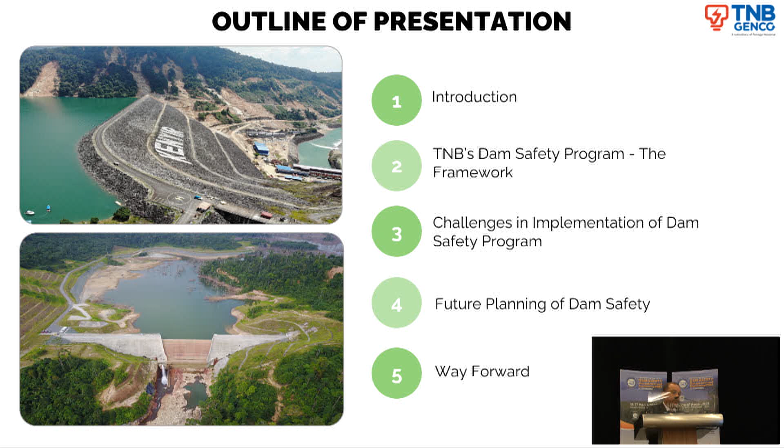So the outline of my presentation today: I will touch a bit on overview and introduction, the framework of our dam safety program, the challenges in implementation of the dam safety programs, what will be our future planning on dam safety, and the way forward.

Okay, basically these are some of the major dams that we are operating and maintaining at the moment. The major function of TNB's dams is to produce hydroelectric power, besides other benefits we contribute in terms of flood mitigation, water irrigation, and water consumption.

The dams are located in a few states - Perak, Pahang, Kelantan, and Terengganu - and were built at different periods or times, with the oldest probably Chenderoh in 1930, and the latest being Ulu Jelai in Pahang and Hulu Terengganu in Terengganu.

So the challenge we have here is that when we built the dams, the design at that time was based on certain assumptions in terms of risk factors and what variables were involved. But now there are so many changes in the factors that impact the dams. I would consider them internal and external factors - things that we are in control of and things that we are not in control of.

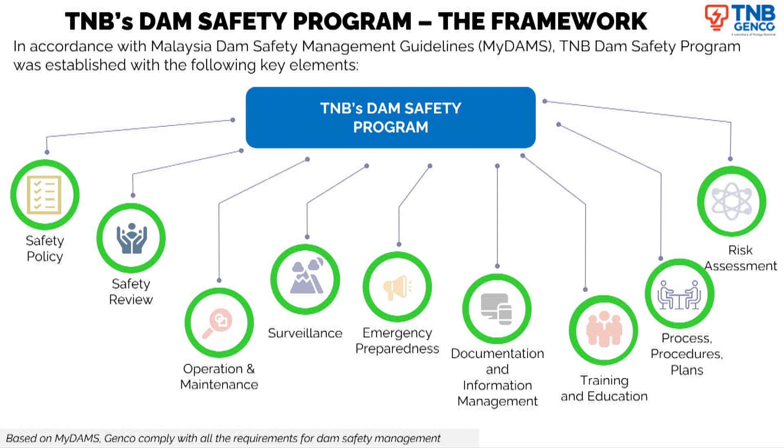So the first thing that we do is establish the safety policies on the 3rd of January 2022. So the policy is very important to give the undertaking from the top of management that we take dam safety management very seriously. So the commitment is from the managing director himself, and with the policy we outline what standards we are going to use, and the standards are going to be established and used across all our dams in our system.

Okay, next. And the dam safety review, as I mentioned just now, is carried out by registered professional engineers, by specialists, both from inside and also foreign, outside the country. This dam safety review is carried out for both structural and non-structural areas.

We look at the whole dam's safety aspects, and from the report, we use it to enhance or close any gaps found by this report. So this is very useful, as I mentioned just now, with regard to the new factors, the new variables that surface now.

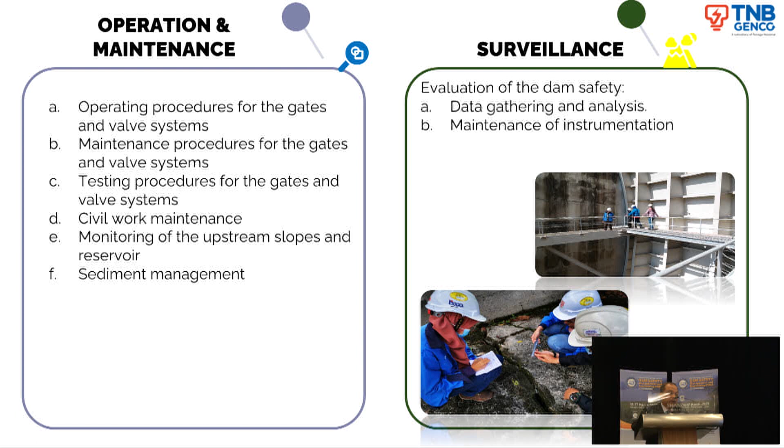Okay, next. The emergency preparedness, as I mentioned, is something that we take very seriously. We carry out drills every year, especially on the high-risk dams, and we engage the authorities, the major stakeholders like the district office, which chairs the local emergency preparedness, the bomba, the firefighters, the police, hospitals, and etc.

And we keep on engaging the people through many programs, through many briefings and talks, even at the school level, to let them understand what needs to be done, and what are the risks involved when they are living or staying very near to the dams.

Okay, next. The documentation and information management is very important, because all this data or information about the dams has to be properly documented, properly stored, and when you need it, it has to be available. All this data has to be verified and put in one place where it can be accessible to everybody. From there, all this data is used to carry out the risk analysis, and so on. So we make sure that now we have a centralized, very structured way of managing our data and information.

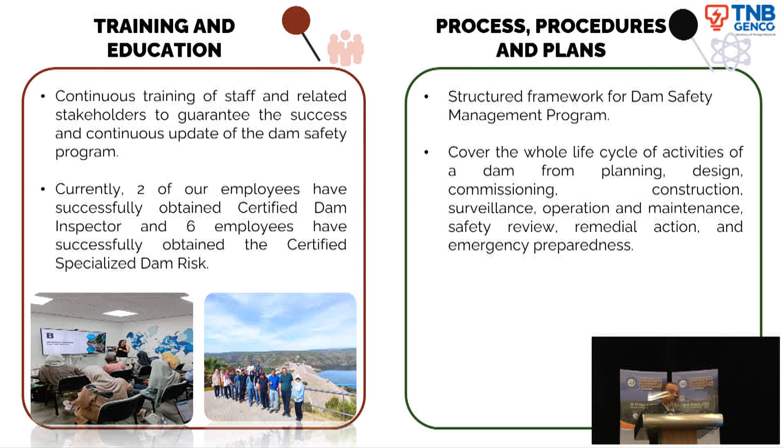All right, next, the risk assessment, as I mentioned just now, is also very important for us to carry out, to ensure the dam's status is at the level that is acceptable or meets the guidelines that we refer to.

So one of the latest programs we are doing right now is risk-informed decision-making. The objective of RIDM is to identify the dam's risk. We carry out the analysis, do the ranking on the risk, do the qualitative and quantitative analysis, what will be the impact if things happen, what will be the impact to the dams, and also, if we need to upgrade or improve the dams, what will be the cost-benefit analysis we need to carry out, so that whatever improvement we do is optimized in a manner that ensures the dams are at a very safe level to be operated.

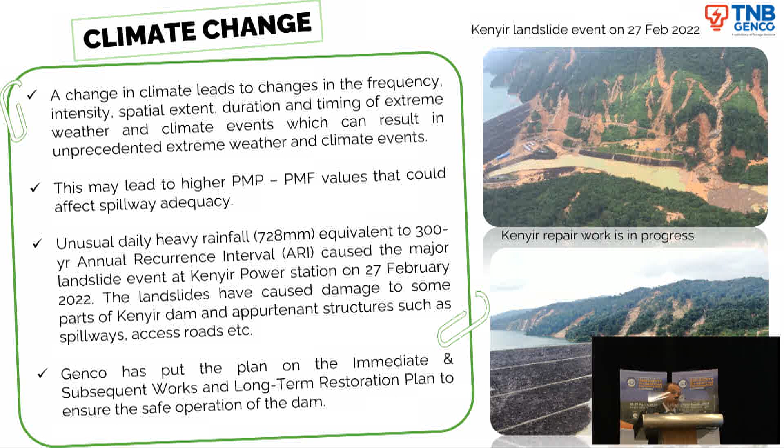Okay, next. I will go very fast. This training and education, I think I touched on just now. Next. Okay, on the future plan, please, next.

Okay, these are things that we are looking into. I think we want to enhance the dam's operation and maintenance through a more digital way, with new technology that we are embarking on, such as automation and instrumentation. We need this new technology to manage the dams so that we can gather more data, carry out better analysis, and enable more informed decision making.

On the dam safety chair, we are already part of the dam safety chair between GENCO and Uniten, where we can easily share information, knowledge, and so on.

Okay, next. On the way forward, next. These are some of the ways forward that we are looking at. We talk about integration of the whole system end-to-end, from the design to the end of operation, and also involving as many people as possible to help us. The instrumentation and monitoring has to be efficient, and we need to carry out risk assessment for all dams.

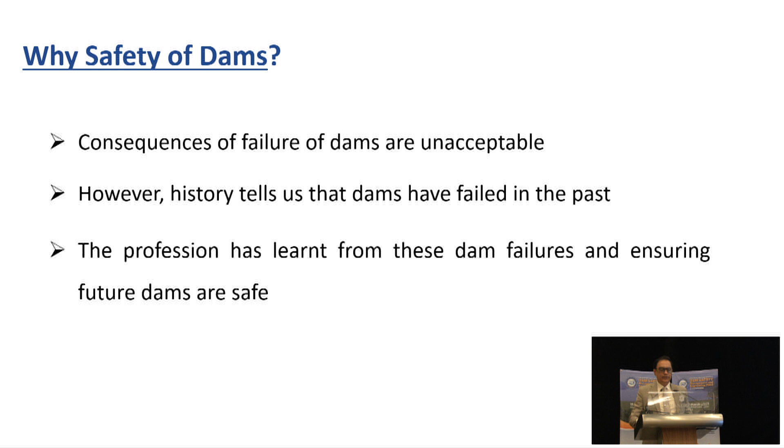Why is dam safety important? The consequences of failure of dams are unacceptable. This goes without saying. However, history tells us that dams have failed in the past, and the profession has learned from these dam failures, and we endeavor to ensure that our future dams are safe.

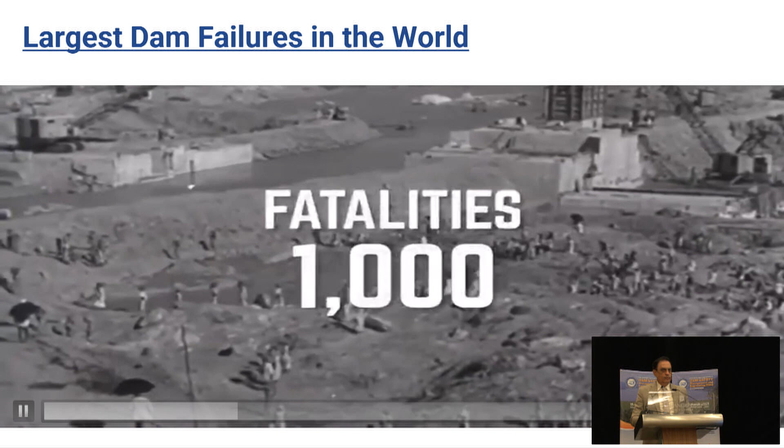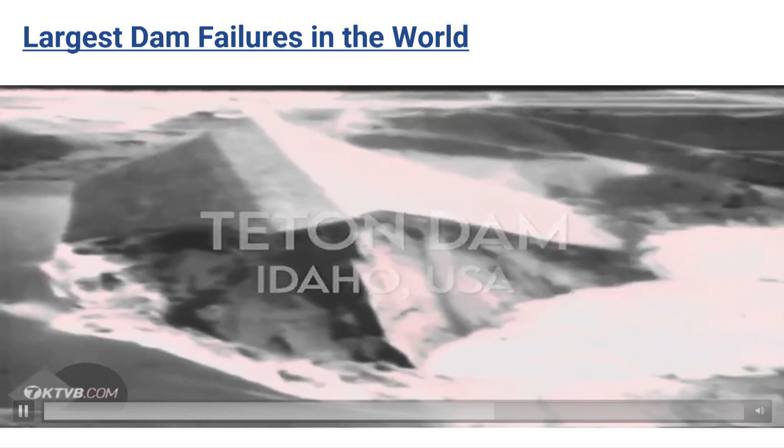Let's see videos of some of the dams which were not covered yesterday. Could you open the audio as well, please?

Highlighting the salience of a case study, the Teton Dam failure in 1976, an earth-filled dam standing at a height of 305 feet. Dams are very vulnerable at their first filling. In the first filling in 1976, catastrophic failure occurred due to development of sinkholes and a piping mechanism, one of the most important causes of dam failures. The embankment breached within hours after the first sign of seepage, and usually response time for mitigation is not available. The resulting release of water inundated an area of over 300 square miles, traveling a distance of 150 miles downstream. The dam failed due to design and construction flaws.

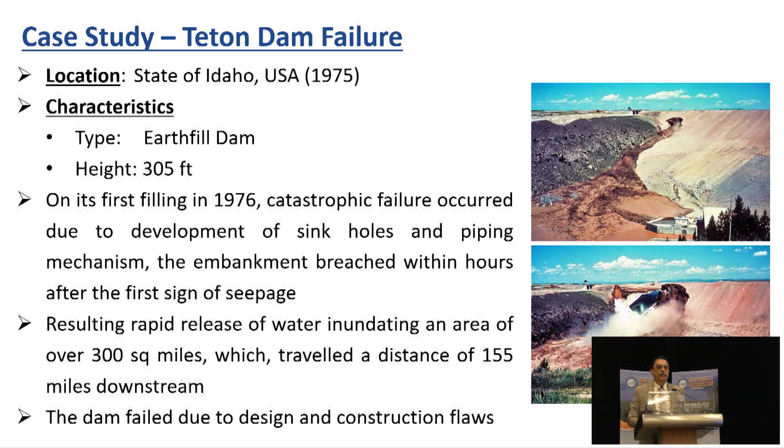I'll give a very brief snapshot of what WAPDA is.

WAPDA is the Water and Power Development Authority of Pakistan, and our charter is integrated development of water and hydropower projects for the socio-economic uplift of Pakistan. We have developed storage dams of more than 20 million acre-feet capacity, among the largest in the world. We are also the largest supplier of hydropower, contributing over 95% of the country's hydropower. We have the institutional capacity to plan, develop, operate, and monitor water and hydropower projects, and are financially viable for supporting future expansion plans. WAPDA's operations are aligned with Sustainable Development Goals, UN SDGs 6, 7, 8, 9, and 13.

At this point in time, we are operating 22 operational projects, generating close to 9,500 megawatts, with a storage capacity of 20 million acre-feet.

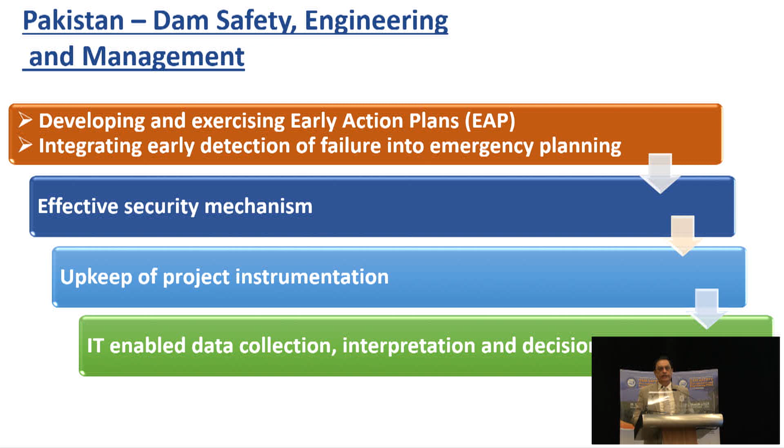How do we articulate dam safety engineering and management? It is done at 3 tiers. At tier 1 is the project office, which carries out routine inspections, emergency preparedness planning, and rehabilitation options. At tier 2, we have a dam safety organization at the federal level.

This provides surveillance through inspection and instrumentation and deficiency investigation. At tier 3, we have periodic inspection, with third-party independent experts coming from around the world who carry out comprehensive periodic review of dams through national and international protocols by a renowned expert. This is done almost every 5 years.

So how do we organize these tiers? At tier 1, which is the project office, regular inspections are carried out, empowered by 4 departments at every project site: an instrumentation division, a seepage and geology division, a movement control survey division, and a sedimentation survey division. This is the basic tier at the project level.

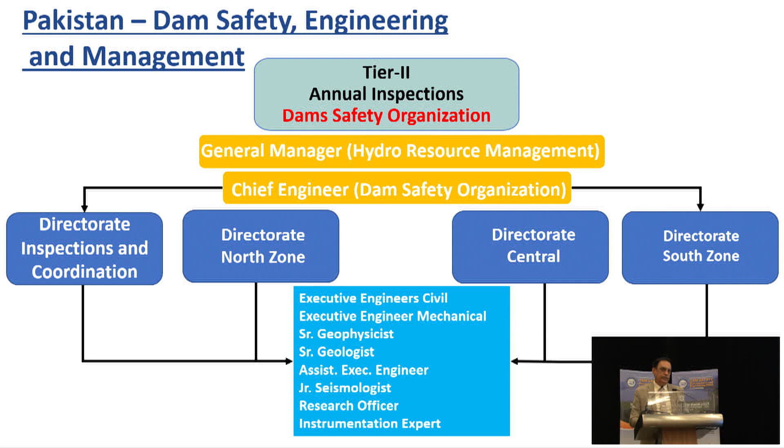At tier 2, we have annual inspections carried out by dam safety organizations. They fall under a central directorate of inspection and coordination, and then we have 3 different regional directorates which carry out dam safety: a northern zone, central zone, and a southern zone directorate, empowered both in terms of manpower, equipment, and skills.

Now, what are the critical dam safety factors? Pakistan, as indeed the entire world, is at the mercy of climate change, and we are prone to both flood and seismic activity. This has become significantly important during recent years. Obviously, as elsewhere in the world, sedimentation continues to be a challenge.

How do we address this? Technological awareness through instrumentation is absolutely necessary. So we have put in place hydromet stations across the rivers and streams. At this point in time, more than 200 hydromet stations have been deployed, and their deployment is essentially in the north, which is from where we draw our rivers and our waters.

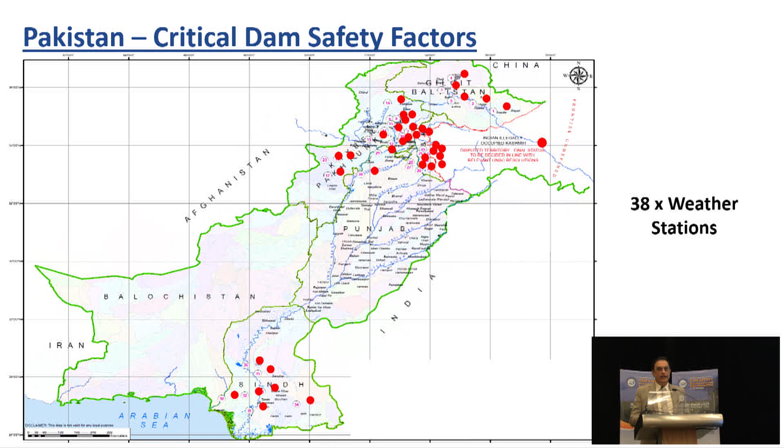Equally important are weather stations. There are 38 weather stations that monitor rain and other weather-related events.

Seismic activity is most significant. Pakistan lies in an active seismic zone, and all dams in Pakistan are designed based on site-specific seismic hazard studies following international practices. These studies are carried out and vetted by top experts in the world, and WAPDA maintains 29 micro-seismic stations at every dam site, along with a rigorous network of strong motion accelerometers to monitor the structural health of the dams.

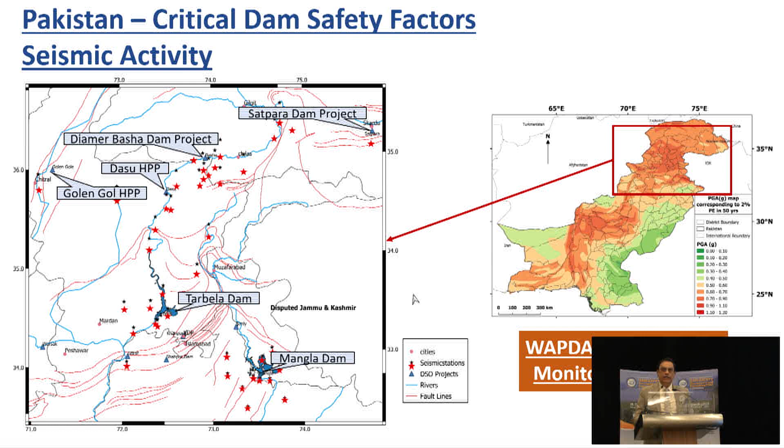Critical seismic factor: as you see on this slide, the safety evaluation of earthquake is given, and the peak ground acceleration is also indicated. A look at the figure will tell you how intense these could be in areas where our large dams are located. In Tarbela, it's 0.65 G, and Diamer Basha Dam, which is under construction, is designed to cater for 0.64 G. These are huge values.

So what are the dam safety phases we need to consider? Safe design to start with, and continue to review it. The challenge is how to cater for all these design parameters and risk factors for structures built 50 years ago. Construct to international standard and adopt changes in design due to site conditions observed during construction. This is significant. And continue to operate safe and sustainable, resorting to periodic maintenance.

Very quickly, two case studies in safe operations and maintenance. The largest earthfill and rockfill dam in the world, Tarbela, height 470 feet, earth and rockfill. Look at the live storage capacity when it was built, around 10 million acre-feet, good enough to submerge at least 30% of the country. Installed capacity is about 5,000 megawatts.

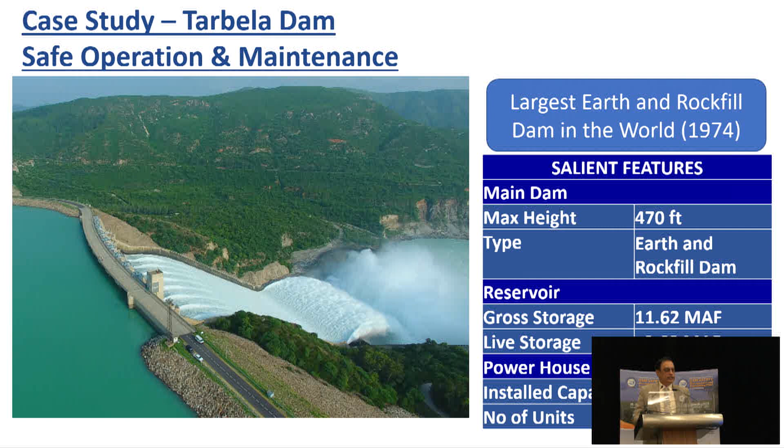Soon after this dam was built, 362 sinkholes developed in the upstream blanket due to open work gravel in river alluvium. These sinkholes were by no means small—the largest had a diameter of about 40 feet, and the deepest sinkhole had a diameter of 13 feet, occurring because of excessive erosion. WAPDA at that time adopted innovative measures, including sonar detection and filling through large barge dumping, with expert advice from renowned world professor Dr. Arthur Casagrande. From the formation of sinkholes in many clay cores, the profession learned about self-filtering criterion from this incident.

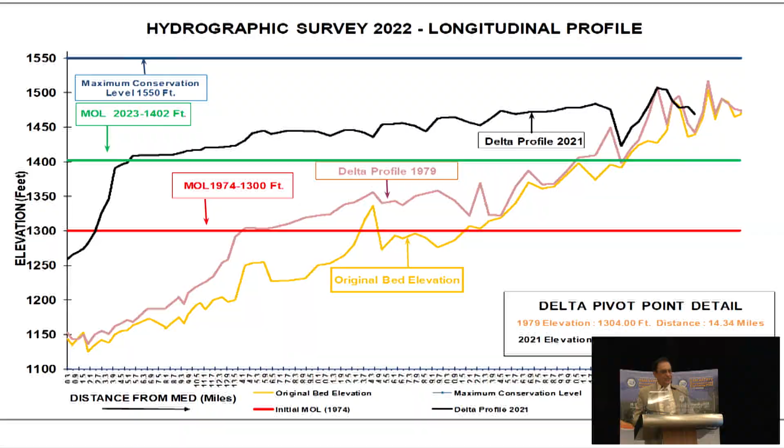High sedimentation is the issue, and the challenge is that it reduces irrigation supply, damages power installations, flushing causes damage to downstream infrastructure, and blockage of low-level tunnels due to liquefaction of sediment. What are the solutions? Sedimentation is the largest challenge dam operators face throughout the world. Short term: raise the minimum operating level from 1,300 to 1,402, and retard the advancement rate of sediment from 0.3 miles per year to 0.16 miles per year.

In the medium term, the intakes of tunnel 3 and 4 have been raised. And in the long term, another dam is being built upstream of Tarbela, which will enhance the life of the reservoir by 35 years.

This is a brief case study of the under-construction tallest dam in the world, standing at a maximum height of 272 meters, but lying in an intense seismic zone, also prone to GLOF, glacier lake outburst flood phenomena. The dam has a live storage capacity of 8 million acre-feet and a generation capacity of close to 4,500 megawatts. As we were undertaking the design, the seismic activity and unprecedented floods mandated a review.

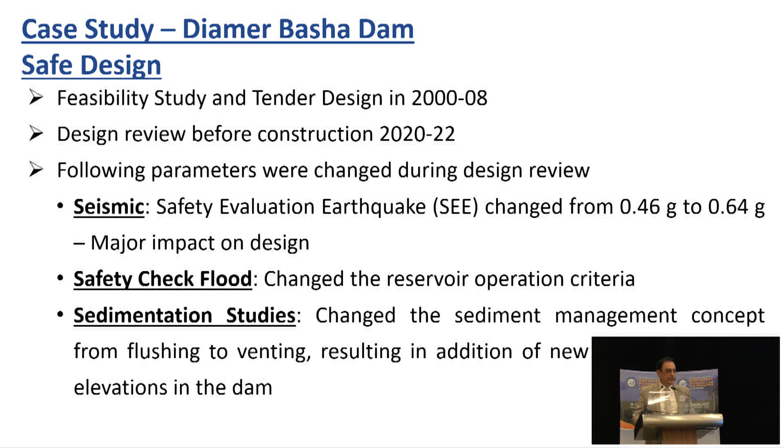This dictated feasibility in 2008, and because of seismic activity, we had to change the G from 0.46 to 0.64. For safety check flood, we changed the reservoir operation criteria, and the sedimentation study changed the sediment management concept.

Changes in powerhouse cavern, waterways, shifting of left power tunnels - all of these had to be undertaken.

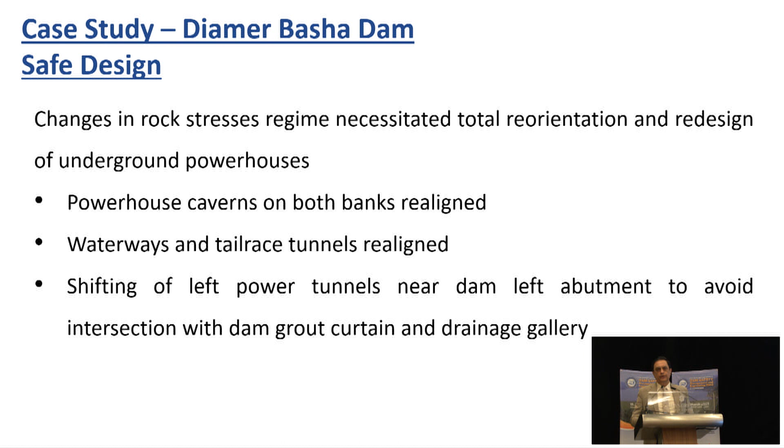So for state-of-the-art knowledge, various organizations provide guidelines, including ICOLD, and we also draw sources and inspiration from other sources of knowledge.

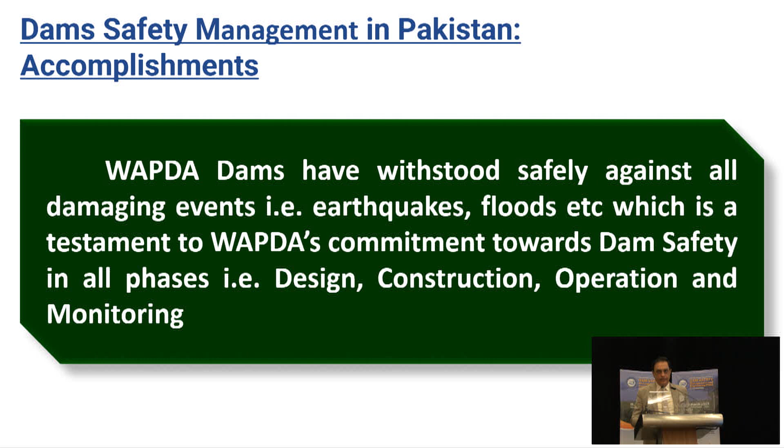WAPDA dams have withstood safely against all damaging events, earthquakes, floods, etc., which is a testament to WAPDA's commitment towards dam safety in all phases: design, construction, operation, and monitoring. And this is a slide that you will all love. Thank you very much.

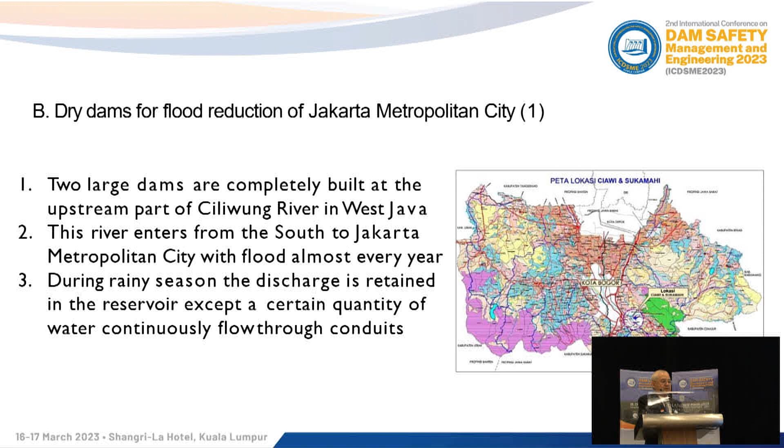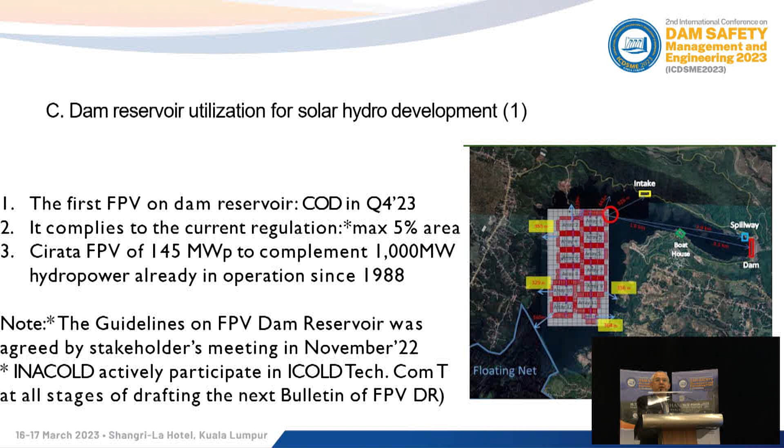For this one, I can go into further details. Cirata is actually a difficult example as a pilot project. Why? Because the height of the dam is 125 meters, and the water level going to the bottom can reach about 100 meters.

There was a long discussion on how to secure dam safety. We had to convince the developer for almost 2 years to take into account what should be done to secure the dam, the spillway, and the intake in case of any failure to the floating PV, either through the anchoring or mooring system. That is why the anchoring and mooring system, shown on the bottom right, is very carefully designed.

We learned from the failure of floating PV at Yamakura Dam in Japan. The critical issue there was the anchoring losing its power because of a typhoon. For that reason, in our case, we added special protection to the intake, the spillway, and the dam. We are now monitoring the construction of this anchoring and mooring system, which started in March and should be completed around September or October this year.

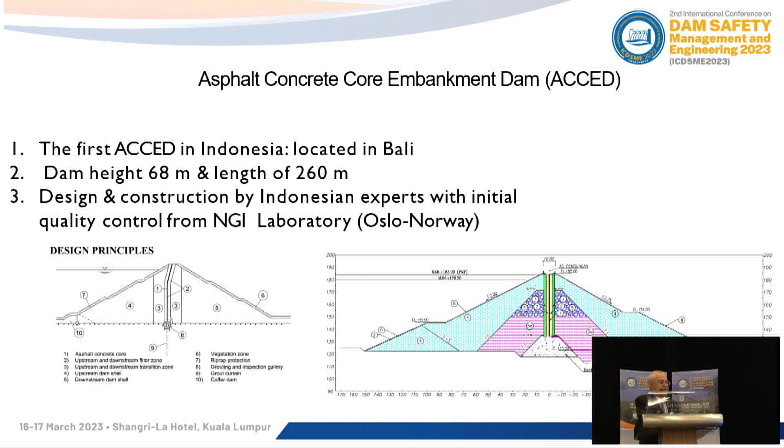So what we did was modify the paver and other equipment available in Indonesia, without waiting for special equipment from Europe. We also used natural sand instead of crushed sand, and conducted triaxial tests on site at a later stage after learning from experience, since sending materials to Norway takes time. The detailed design and construction by Indonesian experts for this asphalt core was successfully conducted, as shown on the right of this slide, completed a few months ago. We are now happy to see two more asphalt core dams in progress in Bali Island, and another in Timor Island.

So these are the closing remarks. Dam safety is paramount at all stages of hydropower and floating PV development. Innovation in design, construction, and operation of dams should be encouraged by the authorities to achieve more sustainable development. My appreciation goes to MYCOLD, and I invite you to see us at the World Water Forum, May 2024 in Bali. Thank you very much, and have a successful conference until the end of this week.

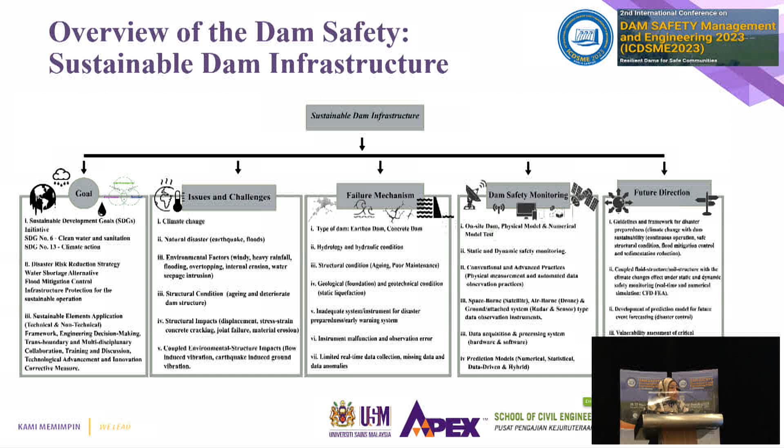This is the overview of dam safety, which supports sustainable dam infrastructure. As you can see here, it has several divisions: goals, issues and challenges, failure mechanism, dam safety monitoring, and future direction, which falls under SDGs - specifically United Nations SDG number 6, clean water and sanitation, and number 13, climate actions.

In my introduction, these are some of the questions I will cover: the potential threats to dam infrastructure sustainability, the potential mitigation measures to support dam sustainability, the dam safety concept, dam safety assessments to support dam sustainability, the triangulation between dam safety, dam sustainability and SDGs, and finally the integration of a holistic approach that may support dam sustainability.

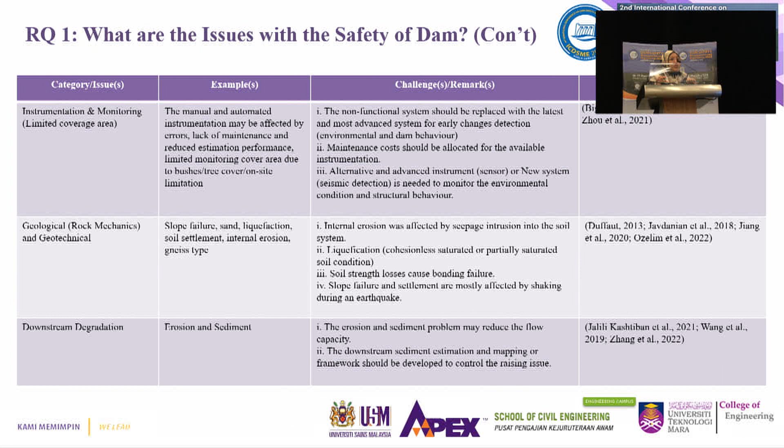As you can see here, most of it, the presence of climate change may alter the environmental conditions, for example with the presence of earthquakes, natural hazards, and the frequent appearance of natural hazards such as earthquake and flooding from intense rainfall events.

And then the presence of hydrostatic pressure, the seasonal variations, the seepage intrusion, and the dam behavior responses may appear in the forms of dam displacement, concrete stress and strains, concrete cracking, and internal erosion.

And the worst one is the downstream part, which receives impact from the high velocity flow, which is downstream erosion and sedimentation.

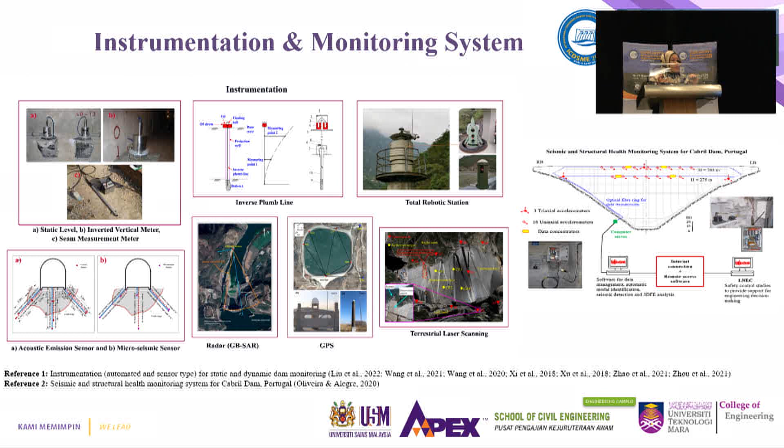And on the right you can see the seismic and structural health monitoring system for a dam in Portugal, which has a vibrating system to detect seismic activity, for example accelerometers, to detect how high the hertz reading is.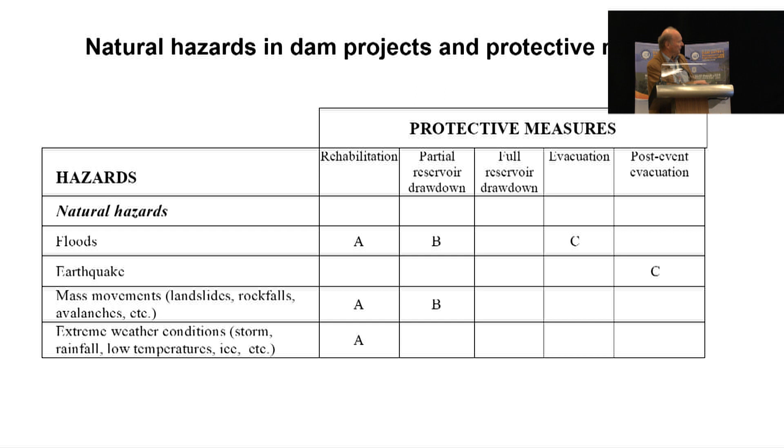Okay. Can you put the full screen? Yes.

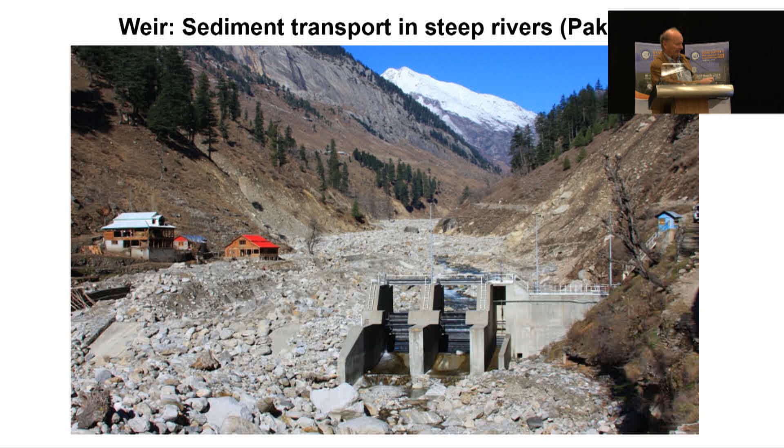Next, please. Yes. Okay. I would like to show a few examples of dam failures which are not so well known, but there were a few significant failures in Italy. This is the Zerbino Dam in Italy.

It is a masonry dam, and it was overtopped, and because it was overtopped, the sliding stability of dams which are actually of moderate height decreases quite significantly if overtopped. If you have overtopping of a 100-meter high dam by 2 meters, it doesn't change your sliding stability substantially. But if you have a 10 meters high dam overtopped by 2 meters, basically your dam may be washed away.

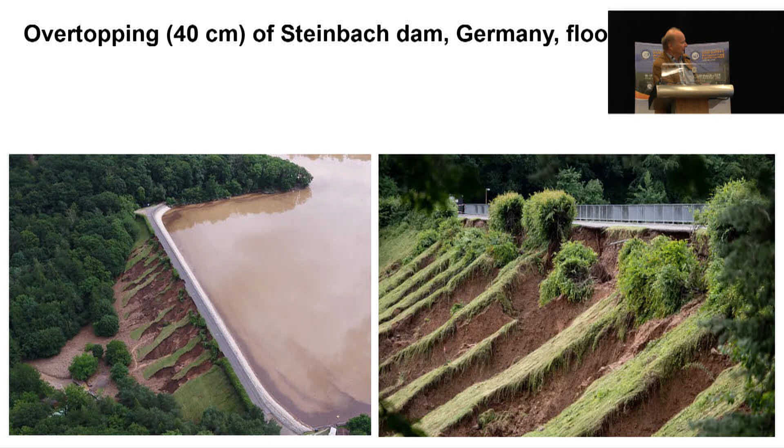Okay, does it come? Somehow this doesn't come.

This is already very old. If you would include in your safety evaluation the seismic loads which were omitted, you would have easily found that this dam was unsafe. And when finally they say static liquefaction—anybody dealing with earthquakes knows if static liquefaction has occurred, this dam has never been safe for earthquakes. This is a typical case. So people like to talk about static liquefaction. It is a kind of people not doing the job properly.

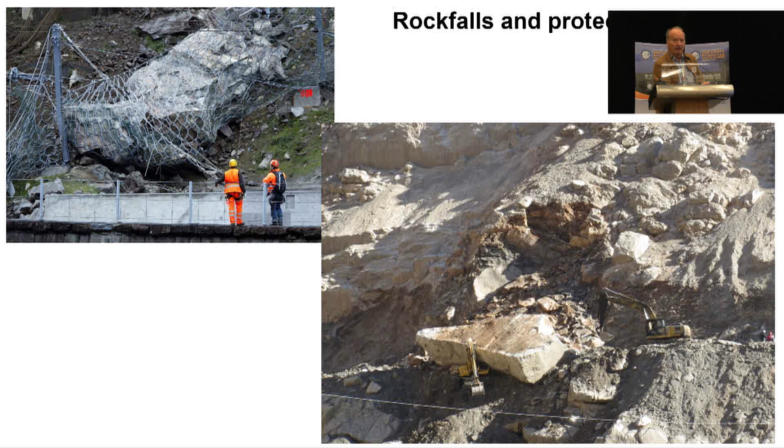We also have, in reservoir impounding, some stability issues, shown here in a reservoir in Iran.

This is the Vaiont Dam, a famous failure of this slope here. You see this whole slope failed. There was one arch dam, at that time the world's highest, 260 meters high. This slope failed with 260 million cubic meters, basically displaced the whole reservoir, and the flood wave overtopped this arch dam by more than 100 meters.

But the dam is in a narrow canyon. When I visited this place about 4 years ago, you see here from this huge overtopping we just have some local damage near the crest. The dam is still there, but it is not operated. Downstream, about 2,000 people were killed. It's the biggest disaster in Europe from dam construction.

This is from Switzerland. This was also the world's highest arch dam at some time, 250 meters. But you see, we also have a lot of rockfalls. Some rock penetrated or destroyed this retaining wall and fell on this abutment. You see here some rocks falling from higher elevation, creating quite some craters in the concrete.

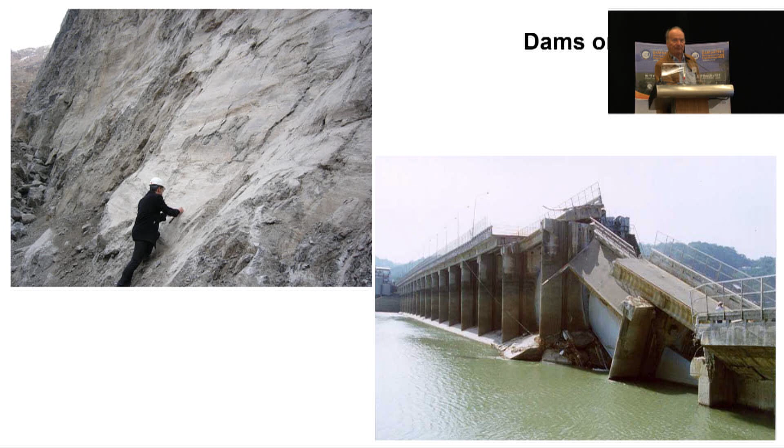Typical features of earthquakes in the epicentral region are the huge number of rockfalls. This is from the Wenchuan earthquake. Some people mentioned about 100,000 rockfalls, not just one. I think it was also mentioned for Kenyir Dam in Malaysia, where it's all rockfalls.

This is from Iran, 1990, just near the dam. Here is actually the intake of a spillway, so quite big boulders falling there.

This is a dam damaged in Japan during the 2011 earthquake. Actually it failed due to overtopping, and about 8 people were killed due to the failure of this dam. The water was released very fast, which caused a rapid drawdown failure of the reservoir flanks.

It's quite unusual - those doing a stability analysis look into the load case of rapid drawdown, but this is an accidental rapid drawdown. You see here this is not just at the dam, this is at the reservoir rim. So due to rapid drawdown, we have this failure.

Now this is from India. You see one of the problems encountered if people are using the old-fashioned design method, which I wanted to mention. Even when an earthquake occurs, some damage occurs, but according to the design method no damage should have occurred. We see here some damage. So the old-fashioned concept, which I'm sure you also like to use here in Malaysia, does not really guarantee that your dam will not suffer any damage.

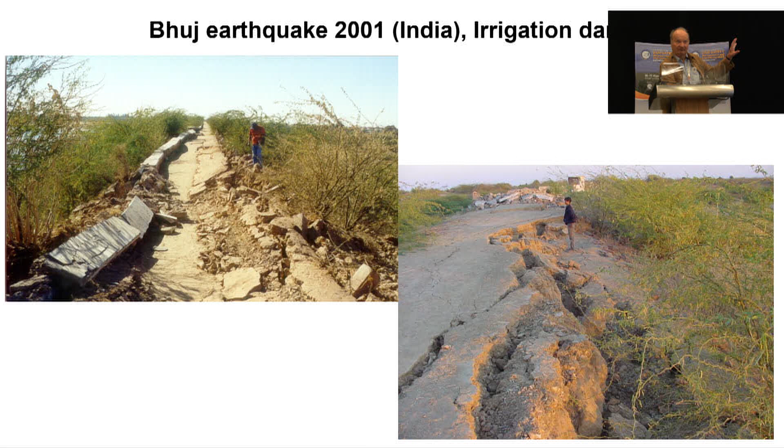This is just to show the effect of the quality of dam construction. Finally, the behavior of dams depends on the quality of your dam.

And you see here, this is in Albania, in Europe. There was only a magnitude 4.1 earthquake. In Malaysia, you can have that everywhere. So if you have a poor quality dam, you see a major slide here, almost a failure.

What I want to say is, if you have a poorly designed dam, even small events like the static liquefaction I showed before could cause failure of these dams. So in your dams, you must be very sure to have really good quality construction.

Next one. This is the opposite case in Japan, a good design. Here the peak acceleration was more than 10 times higher than in the previous one, about 1G. This dam is about a 74-meter high rockfill dam, and it only experienced a settlement of about 40 centimeters.

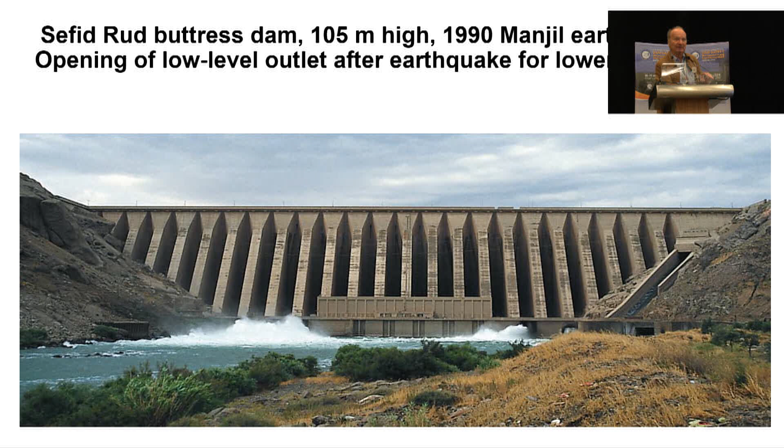Okay, we see here some damage in a concrete dam. There are some cases which are exposed. The next one, just to go.

And of course, we have a lot of damage also on the buildings near the dam. We have damage in switch yards, partly on excavation, partly on fill, and we know seismic structures on fill are very sensitive.

Next one. Now what are the options for mitigating effects of natural hazards? I've just shown a few. First, we can design against these hazards.

Number two, we can eliminate the effects of hazards. For example, for a powerhouse, if you have a rockfall hazard, you build an underground powerhouse, so you eliminate that hazard. So there are some options for how to do that.

We can reduce the hazards by stabilizing, for example, some slopes. We can install early warning systems. We prepare emergency action plans, and we provide water alarm systems for alarming the people, as has also been presented already.

Next one. So let me say a few words about man-made hazards, if I have just 5 minutes left. Man-made hazards, as was also mentioned, include design errors and poor construction. I mentioned already, quality of construction is a key issue.

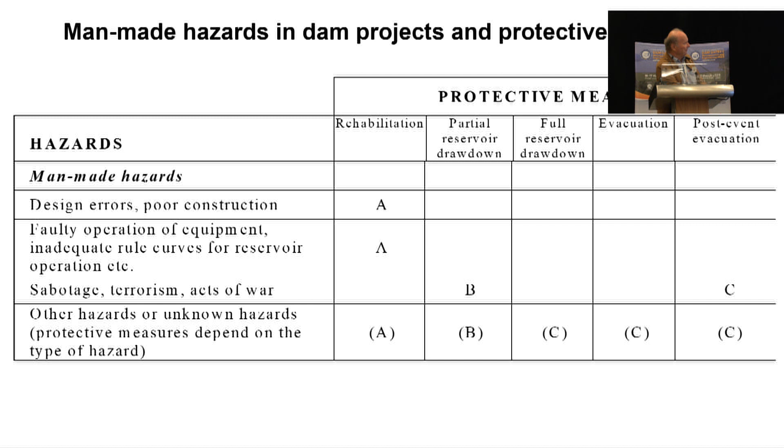It failed because they were pumping water into the upper reservoir, and the water gauge indicator was not working properly. There were new staff, so they were pumping water not knowing that the reservoir was full, and it overtopped.

So we can also say today, if you have upper reservoirs, even though there's no inflow, you still need a spillway, and the spillway capacity must be equal to the pumping capacity. So it is basically also a design error, and it was a faulty error in operating this plant.

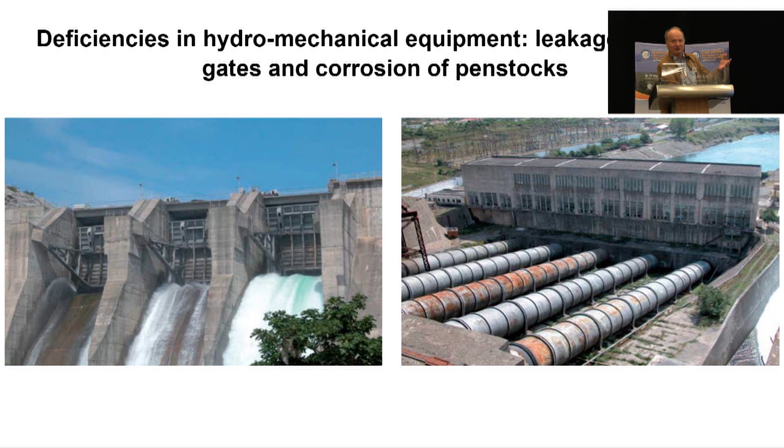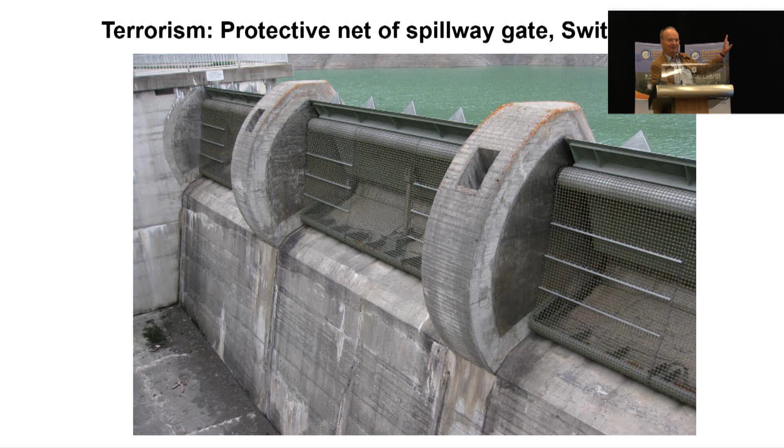Now, there was some problem. It has about 6,000 megawatts, one of the biggest power plants in Russia. Due to the operation of the turbines, there was fatigue failure of bolts, and then due to internal pressure it exploded. It destroyed 9 of its 10 units, basically the whole power plant, the powerhouse, due to fatigue failure of bolts in its turbines.

It took about 5-6 years to replace them, and during that time the water had to be released by the spillway. The spillways are also not designed for this long-term operation. In this area, they also had minimum temperatures of -50, maybe every 10 years. It was pretty cold, so a lot of ice created also in the spillway, affecting the spillway operation.

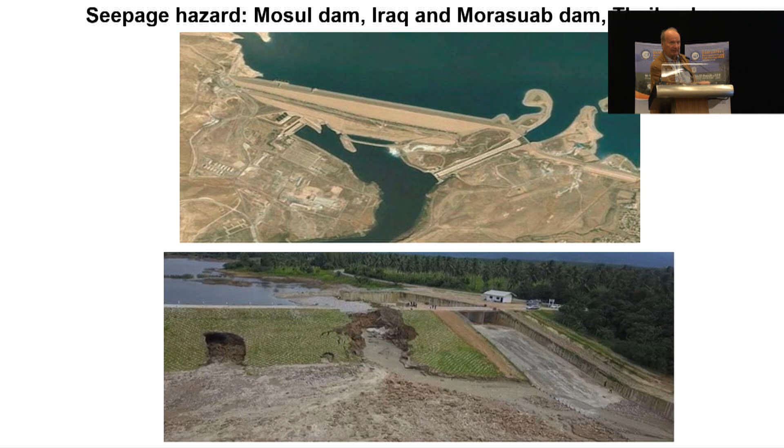To conclude: large dam projects may be subjected to a large number of hazards, not just natural hazards like flood and earthquakes. Most people doing safety analysis are basically focusing only on those, but I hope I have given you a broader view of the hazards which are applicable - natural hazards, man-made hazards, site-specific and project-specific hazards. And there are new hazards which have emerged, and those new hazards are man-made hazards.

Most hazards which I have shown are time-dependent, not only the climate change hazards. Dam engineers actually know how to deal with time-dependent hazards, and those who are concerned with dam safety also know how to deal with climate change hazards. It's not different from the others, and the answer is basically you have to do periodic safety reviews - not a prediction in 100 or 200 years, but a participatory approach by looking into the safety at intervals, let's say every 5 years, and at that time you will see if some action is required.

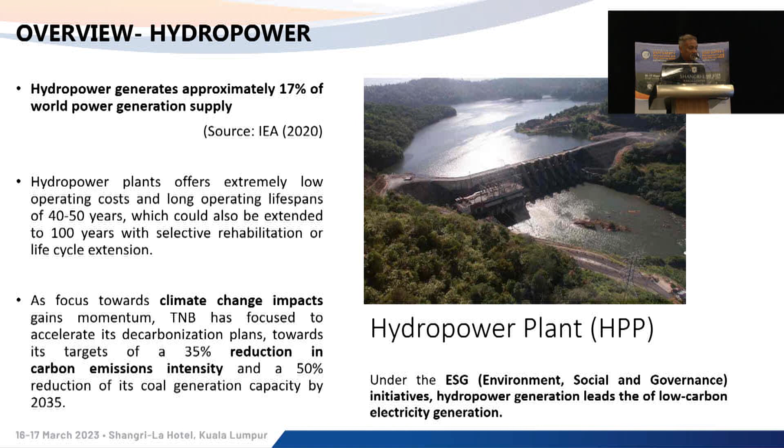So there are a few types of hydropower. So we did talk about storage. So this Piah, I'll be talking about run-of-river. And of course, pump storage, we have plans for that, but we really don't have one yet, but there are some studies ongoing.

So the main components of the hydropower scheme involves weir, intake, tunnel, headrace, powerhouse, and all sort of components. So this layout on the right is for Sungai Piah, for the lower underground scheme.

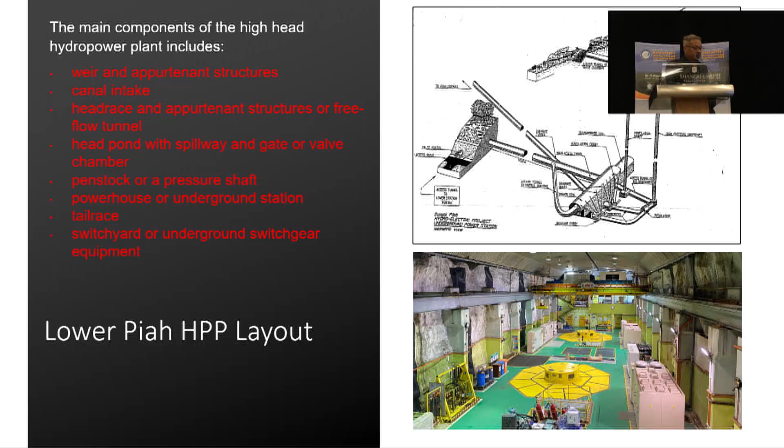Dr. Roslan presented also. The oldest scheme is actually Chenderoh, but apart from that, we also have Cameron, and Piah is about 31 years old. So it's also equally old.

Okay, so we'll be touching on the lower scheme.

So this section of the tunnel, which is about 12.5 kilometers long, consists of the tunnel network from the upper powerhouse right up to the lower powerhouse and the tailrace section. So during our routine inspection, we do inspect these tunnels to see their conditions and so on.

So I'll be touching two of the intakes under this scheme and their conditions.

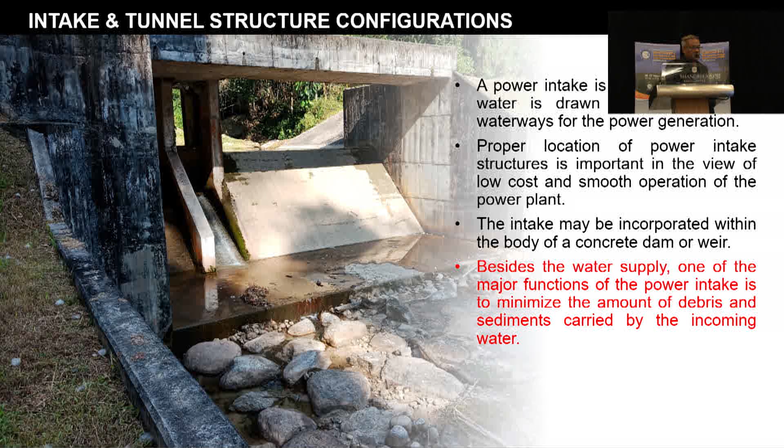So intake and tunnels, they are basically interconnected. The intake is actually to divert the water into the tunnel system and then to the powerhouse. So they have main function not only to draw water, but they also are designed to eliminate to a certain degree debris and sediments.

So by design, there are two types of design for the intake. One is what we call a lateral intake structure, which most of the larger intakes will look like this. They will involve inlet, trash screen, spillway, settling basin, and so forth.

This is an example of a lateral intake design, which is at Pergao. This is a Terang intake pump station. So these are all the lateral slots that goes into the power system.

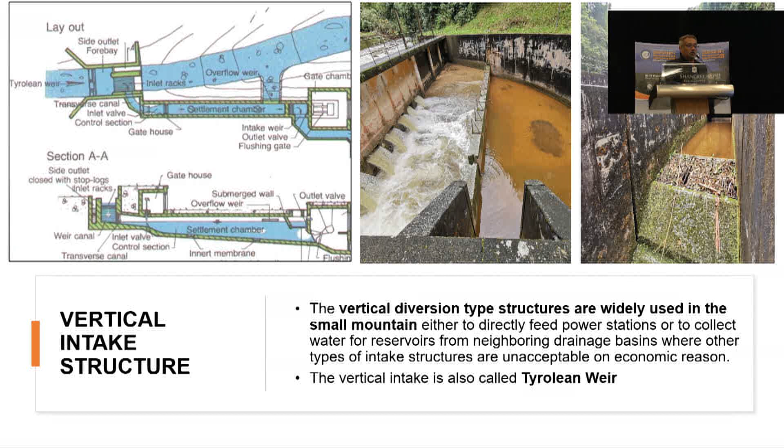While the vertical inlet structure also has a typical weir that diverts the water, here the water enters through the intake structure through a series of vertically installed trash screens, and then it goes into the tunnel system. So water drops more of a vertical motion.

This is an example in Austria. So this is a full inlet that's placed on the weir. So ours is slightly different than this design.

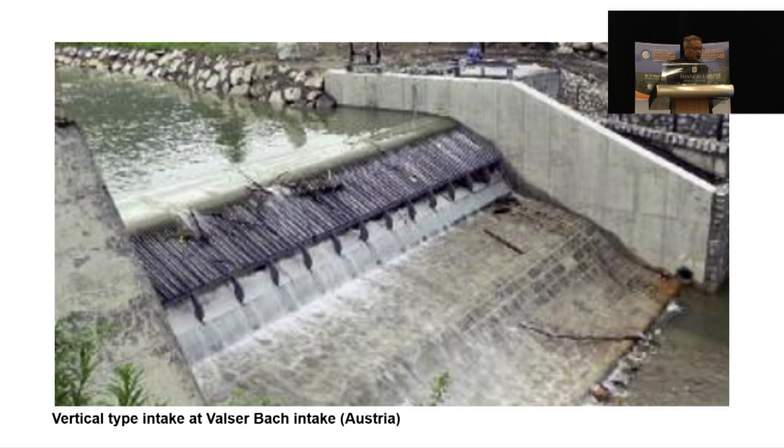Okay, so 2 case studies. So this is Sulieh. So when we inspected this structure, we were hoping to see a lot of structural damages, but we also found other things that are there inside the tunnel, which also requires attention.

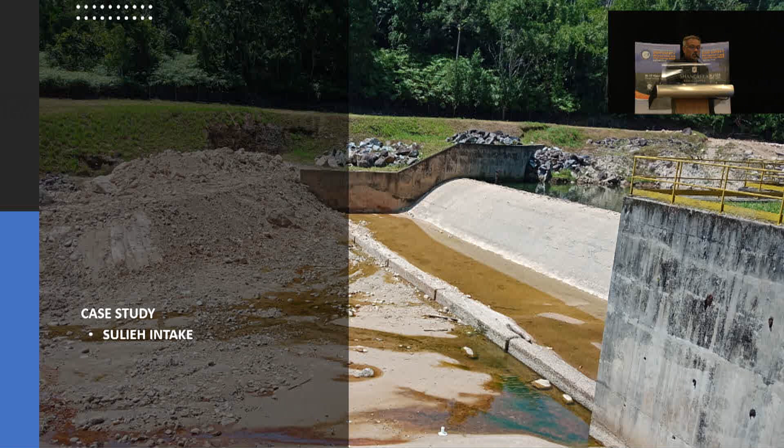Okay, so it has a lot of features. It has a weir, it has an intake chamber, it has a desander, and also flushing conduit. So basically, when this was designed, in 1980, the design included a desander, so there was a design assumption that sediment will enter this intake and it has to be mitigated, so the design is there.

Okay, this is the desander. It's a single section desander. So when we entered, we do notice a lot of debris at the intake and also at the trash screen.

The flushing tunnel is used regularly to flush, and that's why the desander is empty. Periodically, sediment are being removed from the desander.

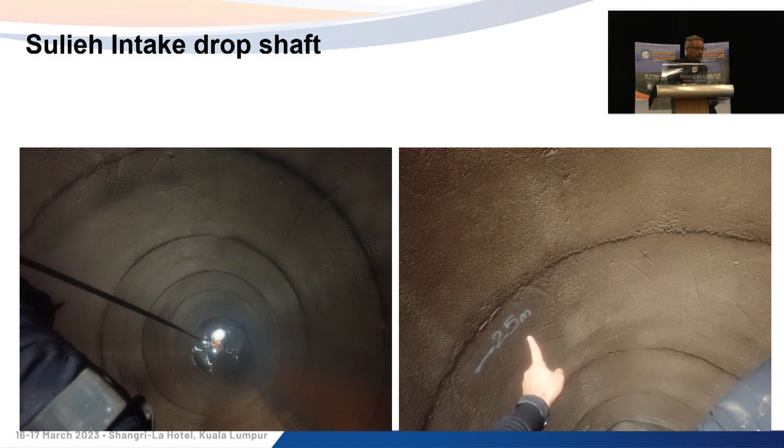We also inspect the shaft. Normally we do this by abseiling from top to bottom. This is about 30-plus meters.

When we drop down to inspect the bottom part, we notice that this section of the diversion adit between the intake and the main tunnel was quite full with sediment. That did not allow us to enter because the mud there is a little bit soft, and it's almost about 10 meters in length, almost blocking the entire opening.

This is the view of the sediment that we noticed from inside the tunnel. That makes us wonder about the capability of the desander, and also why so much sediment entered into the main tunnel from the intake.

Findings: the pond itself has quite a large amount of sediment at the intake area, mostly consisting of sand, silt, and clay.

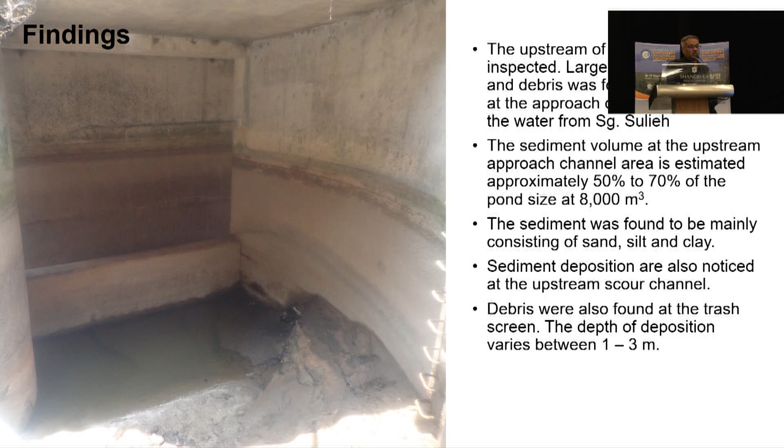Inside the tunnel, we notice the adit is almost 50% blocked. While the sediment volume is not so big, once it's completely blocked, we will have a backwater effect, so you don't get a fully efficient tunnel system going through the hydropower scheme.

This is the upstream. It's a very small stream, single stream. So we went down.

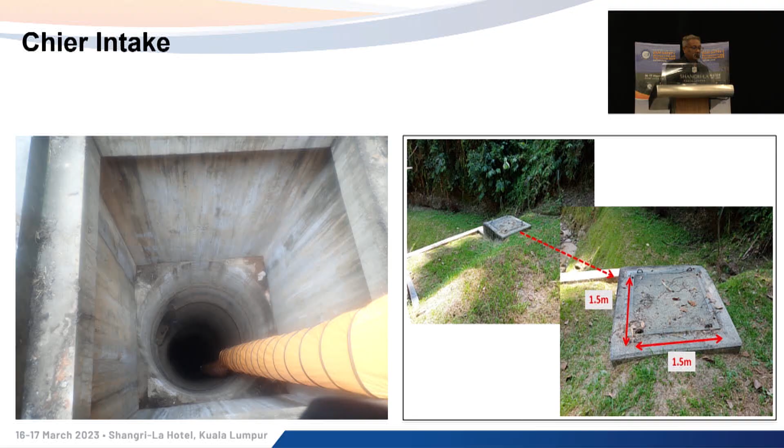Again, you notice there's a lot of sediment inside the tunnel section.

Here we try to go in to see how far we can go in. This engineer is seated there; you can go and ask him about his experience. Over a 30-meter length, the full section is covered, almost about 70-80% of the entire tunnel system, blocking the whole section of the inlet.

Inside the tunnel sections also, we notice a significant amount of sediment. Findings next.

By estimation, we noticed that for the design period, the sediment volume is roughly around 5,000 cubic meters a year, but today we are looking at 10 times more. When it's 10 times more, definitely everything will start to choke.

More frequent maintenance, more cleaning, and more inspection have to be carried out to identify how we are going to address this issue, because it also causes inefficiency to the hydro plant itself. This is an ever-going battle that we address.

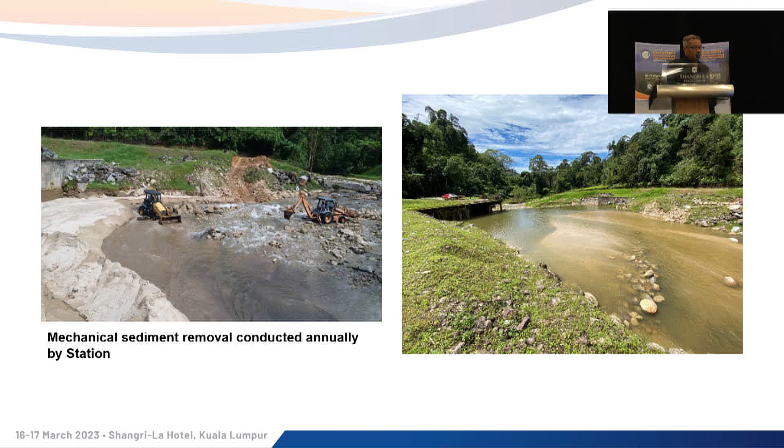We carry out some periodic clearing work at the intakes, including mechanical excavation. This is at one site, where people work manually because it's a very small area and you cannot bring an excavator in, so we have to do it manually.

Conclusion: the design caters for an older configuration. Nowadays, with more land clearing and so on, we need to relook at the configuration as well as the design requirements. We might need more desanders or more frequent maintenance, but these are some of the issues we are addressing for our hydro intake.

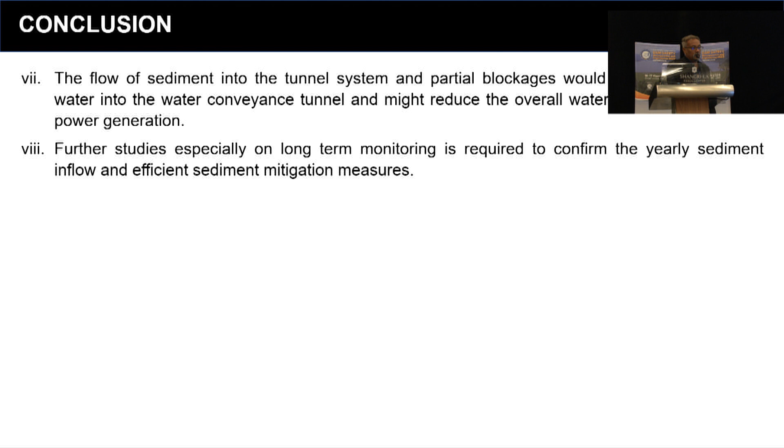Monitoring is still ongoing, and we also try to improve every time we see a situation arise. Thank you, this is the end of my presentation.

I hope that was 10 minutes. We're doing excellently, much better for time than before. We have time for one question, if anybody would like to ask.

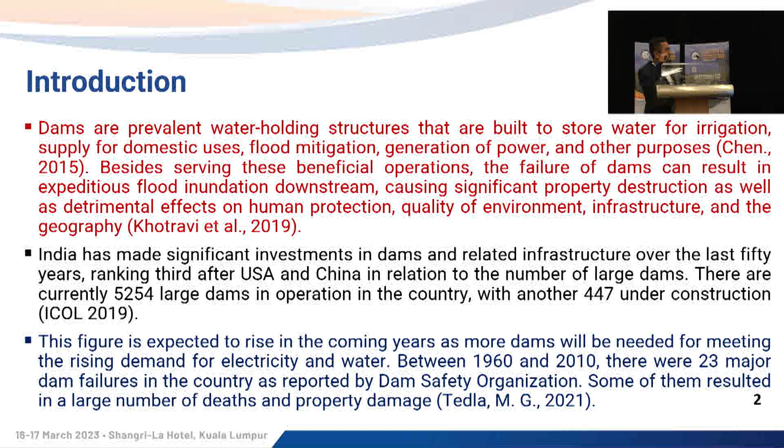For consequences, dam break simulation and subsequent flood simulation are critical for identifying the mitigation potential of dam failure threats. Over the past few years, HEC-RAS, Hydrologic Engineering Center River Analysis System, has become the most frequently used software for dam failure studies.

It is open source. My study is based only on open source datasets. In the scarcity of data, we can use open source datasets. Our data is based on geospatial techniques. Many researchers have simulated models based on HEC-RAS dam break analysis.

The objective of my study is to perform dam break analysis of Ukai Dam using a 2D HEC-RAS model, to prepare flood inundation maps in terms of water depth, velocity, water surface elevation, and arrival times, and to predict dam break flood magnitudes and generate the break hydrograph. These are the three objectives I'm going to present.

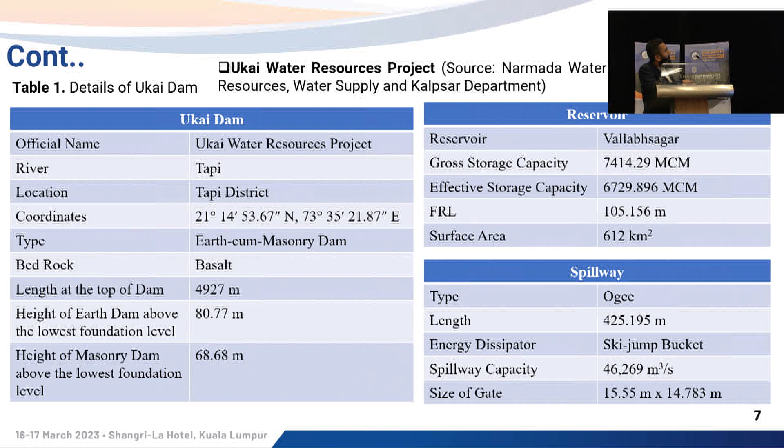These are the data I have used. SRTM data, as I mentioned, this dam break analysis uses open source data. We used 30 by 30 resolution DEM, sourced from the USGS website. The projection file was directly downloaded from spatial references. The land cover map was obtained through MODIS land cover. Inflow and discharge data of Ukai Dam came from the 2006 flood hydrograph, with hourly inflow and discharge values.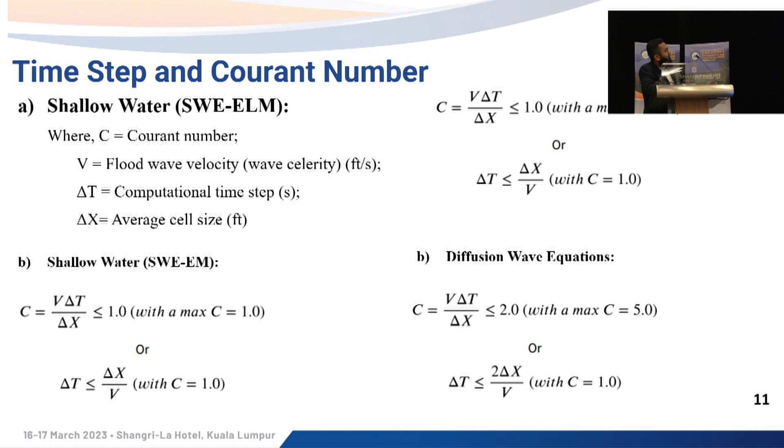These are the inflow hydrograph as an upstream boundary condition, and slope as a downstream boundary condition.

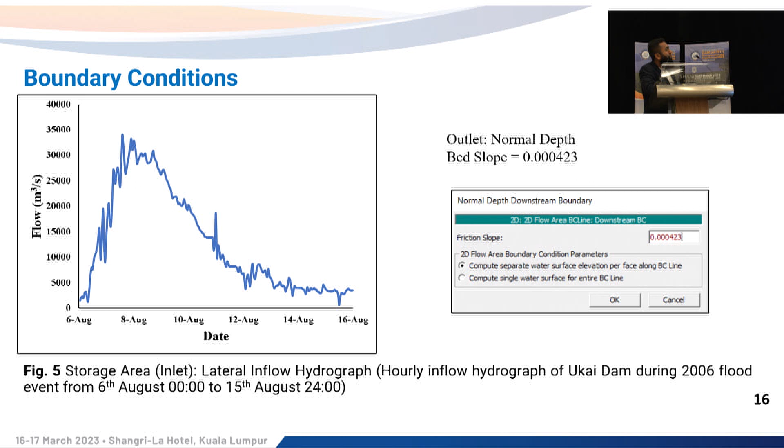It is very important for the decision maker to take a decision on what should be the scenario of flood inundation. It is very important to send the message to the authorities for prior evacuation.

This is flood velocity. I have marked the velocity, and you can see up to Kadod area it is 4 to 6 meters per second, quite high. But in our city area, it should lie between 1 to 2 meters per second.

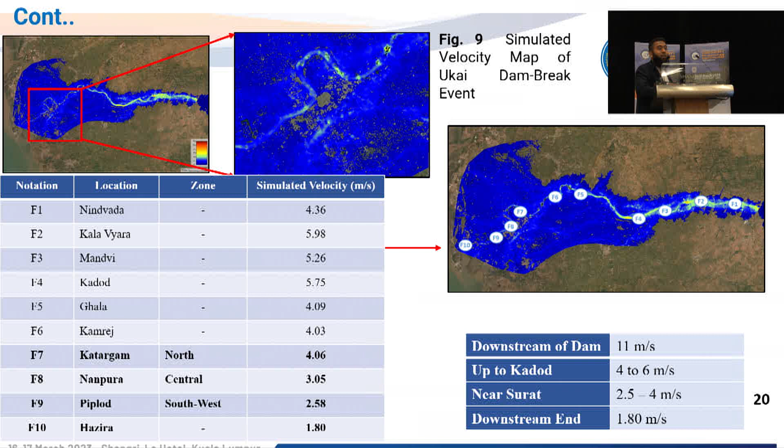This is the water surface. The downstream of the dam is 80 meters up to Kadod, and downstream in the field it's 8 to 9 meters.

Now this is the arrival time map. We can also prepare the arrival time map using HEC-RAS. You can see here arrival time is 10 to 13 hours, meaning if the dam breaks, it needs 10 to 13 hours to inundate Surat city.

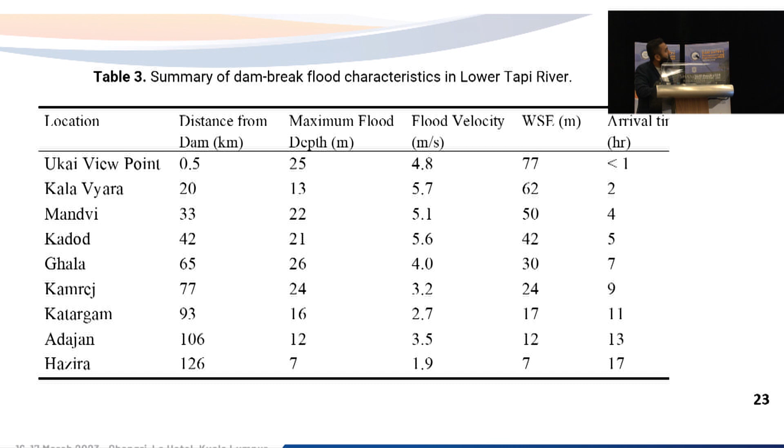This is the summary table: distance from the dam in kilometers, maximum flood depth with respect to this area, flood velocity, water surface elevation, and arrival time.

Summary of simulated results: from the analysis, we can see the north and west zones of Surat city are found significantly affected by the dam break, and the flood wave may cause severe damage to the study area. Water reaches the river channel in Surat city within 10 to 13 hours from the Ukai Dam after dam break. The east zone at 13 hours, west at 14 hours, and north at 14 hours were the first to get inundated.

Followed by southeast, central, and south zones, and lastly, the south-west zone is inundated at a 17-hour arrival time.

The depth of flood water is found to be maximum in the north zone at 8.72 meters, east at 7.56 meters, and west at 6.28 meters. These are the statistics. And the velocities lie between 2.5 to 4 meters per second, while in the study area it lies between 1 to 2 meters per second.

Now we should know the limitations of the model and future scope. The limitation of the model is that simulations are quite sensitive to DEM resolution. Hydrodynamic modeling can give more precise results with high resolution DEM, meaning 1 to 5 meters at city level, but I have done this on a 30 meter DEM, so that is a limitation of the study.

More simulation data is required to improve accuracy assessment and validation. The model is simulated with a cell size of 140 by 140 meters. Due to unsupported computational hydraulic tables with smaller cell sizes for the large 2D area, this is a limitation.

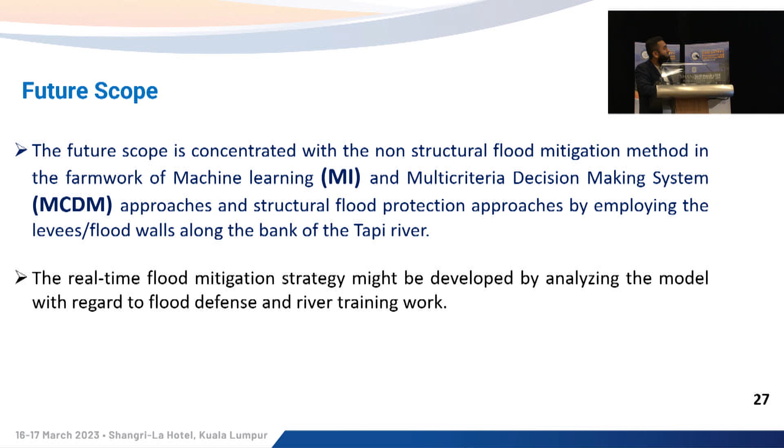The conclusion is that the city area, north and west zones are very highly vulnerable to floods. It takes 10 to 13 hours for the city to be fully inundated. So immediate structural flood retention structures like levees and retaining walls are recommended at flood affected zones. Moreover, non-structural systems can also help disaster authorities with prior evacuation and decision-making.

Thank you very much. I would like to show a small video of dam break analysis, sir.

If you have time, I think. The video is showing at 4:30 today in the big movie theater. Sir, only - how long is the video? Not more than 20 seconds. Shall we take extra time if everybody likes? Because you know, this is somebody else's time. So if you allow, we'll let Dr. Patan continue.

Please allow, it's a 10 second video. You can see how the dam breaks and how your study area will inundate. This is the reservoir area and this is the dam. Now if we provide the inflow hydrograph, you can see the scenario of how the dam breaks and how Surat gets inundated. Let's start. This is the scenario, and this is the Google base map. This is the beauty of HEC-RAS open source model for flood inundation mapping. Thank you very much.

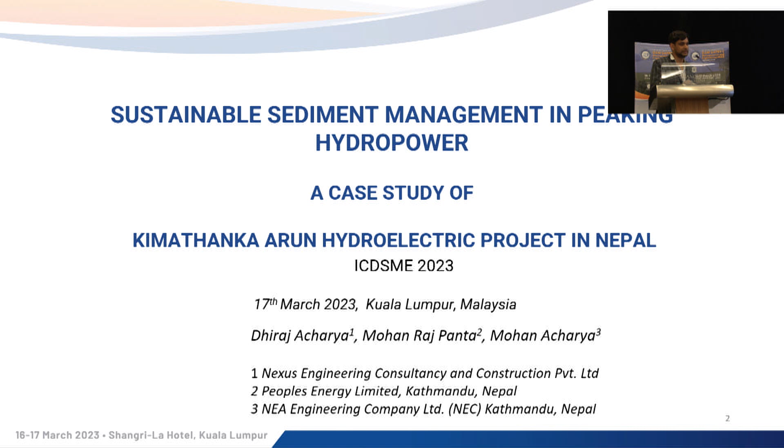I've arranged my contents like this: I'll be talking about the necessity of sediment management and what we have done in the Kimathanka Arun project, about our project details, and then I'll be talking about the objectives, data availability, and discussion of flushing considerations, including the methodology. Then I'll conclude with the results and conclusions.

Need not mention much about the necessity of sediment management in reservoirs. As the dam is constructed, it accumulates sediment and it has to be managed. The 20th century was basically more focused on designing and constructing new dams, but the 21st century should be more focused on sediment management methods. Nepal is located in the Himalayan region and has a very fragile geology. It has a harsh climate and sparse vegetation. Moreover, it also has tectonic activities, that's why it is more prone to sediment susceptibility.

So sediment study is a must in our projects. Dr. Martin also showed a photo of a case in a mountain region. Talking about the methods we could adopt, there could be proactive methods and adaptive methods. Proactive methods relate more to catchment management itself, whereas adaptive methods are more concentrated on sediment routing and sediment removal approaches. I'll be talking about the flushing approach that we have adopted, which is an adaptive method.

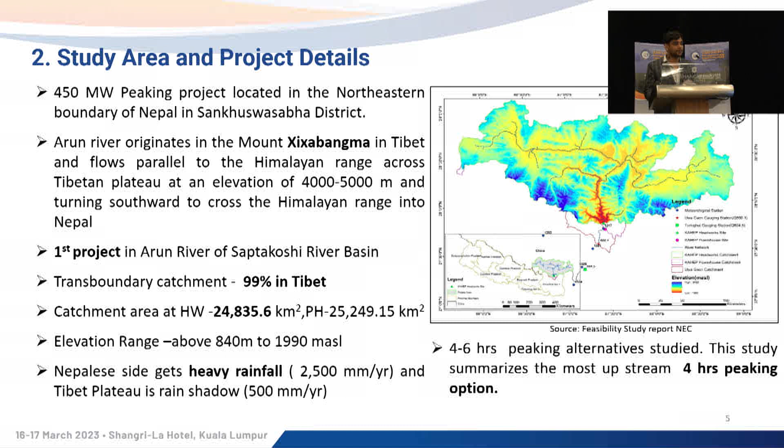It is a 450 megawatt peaking project located on the northeastern boundary of Nepal. It is a transboundary catchment - almost 99% of the catchment falls in Tibet, which is a rain shadow zone actually, but on the Nepalese side we have very heavy rainfall. The catchment area of this project is around 24,000 square kilometers, which is really big if you talk about catchments in Nepal. The project is located on the Arun River, which originates from the Xixabangma mountain in Tibet.

The current demonstration shows the reservoir of 1.6 kilometers and total volume of 3 MCM. The total height of the dam is over 100 meters, but above ground it is 47.5 meters, and it has a live storage of 2 MCM.

We have the coffer dams, upstream coffer dam, downstream coffer dam, the main dam structure, the diversion tunnel structure, and the bypass arrangement designed to bypass flow out of the system. We have provided 3 sluice spillways, 2 breastwall spillways, and 1 overflow spillway for regulating the discharge and PMF.

Talking about the objectives, I'll be discussing sediment management. We have considered sustainability in terms of peaking operation, sustainability in terms of sediment flushing, and verifying the adequacy of the design low-level outlets to evacuate the sediment.

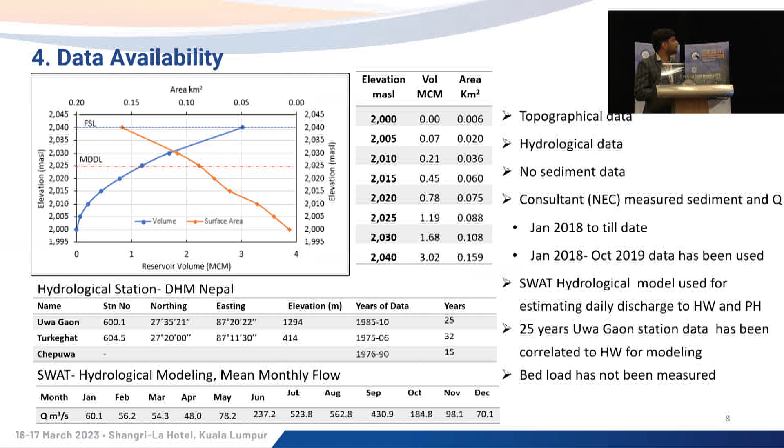Bed load has not been measured as of now, and has been considered as 25% in addition to the suspended sediment load measurement. Suspended sediment loads were measured from January 2018 and continued, but during this study we had data only till October 2019, so this study is based on this time frame only.

In order not to overestimate the sediment load in monsoon and underestimate it during the dry season, instead of creating a single rating curve, we decided to split the rating curves below 200 cubic meters per second discharge and above 200 cubic meters per second discharge. That way we established two rating curves, so as to go more towards reality.

We have developed two suspended sediment rating curves for this project.

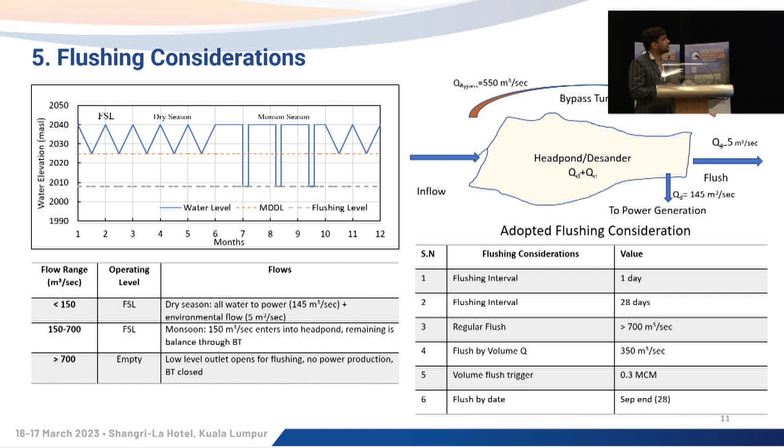The whole concept is that the design discharge is 150 cubic meters per second only, 145 plus 5 is the environmental release. So we'll be bypassing the rest of the flow from the bypass tunnel, and in the head pond or desander area, only the design discharge will be entering. That way, the discharge in the head pond will be reduced, giving a more effective desanding phenomenon, while most of the flow will be bypassed through the bypass tunnel.

Talking about the HEC-RAS model, it is a one-dimensional mobile bed model. For the inputs, we have the inflow to the reservoir, water level at the dam, sediment loads, longitudinal and cross-section details, sediment particle characteristics, and the measured temperatures.

There are 6 inputs. Talking about the boundary conditions, daily hydrograph will be used as the upstream boundary condition, reservoir water level considering the flushing as the downstream boundary condition, lateral flow using bypass tunnel as the intermediate boundary condition, and sediment inflow boundary conditions.

This is how a conceptual model developed in Excel would look like. First, we prepare this conceptual model in Excel, and we give this input into the HEC-RAS 1D to see the validation. Thank you.

We cannot trust the results of any model without doing the calibrations and other checks, right? Since this is a project under construction, we do not have data to validate this model. So at least what we could do is see whether the sediment volume deposition in the model is stagnant or not.

After certain years, there has to be a trade-off, and all the deposition has to be washed away, and then the volume has to be maintained. After 2 years, you can see that the volume is almost maintained. There are some depositions as well as some erosions, and then the volume is always almost maintained.

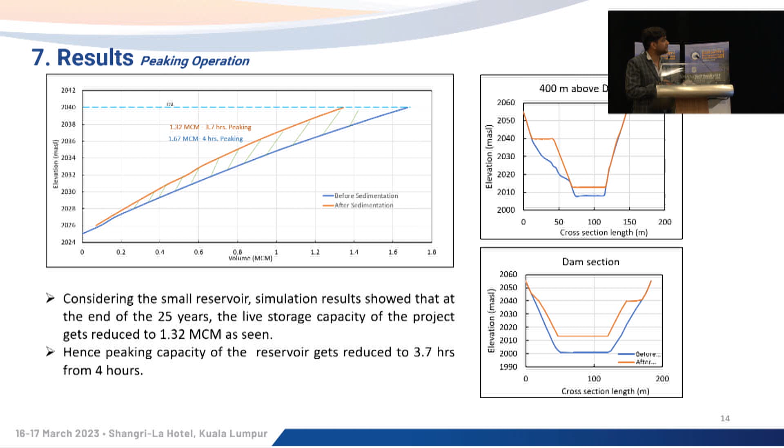I already mentioned about the head ponds performance as a desander, so I have simulated 2 scenarios. This is just after the flush - this is the good scenario, and the other one is the worst scenario.

This is just before the flush, meaning if tomorrow you are flushing, then today is the worst time for the sediment to settle, right? We can see that in both cases, the fine sediment and very fine sediment, fine sand and very fine sands will not get into the intakes, both in wet season and dry season.